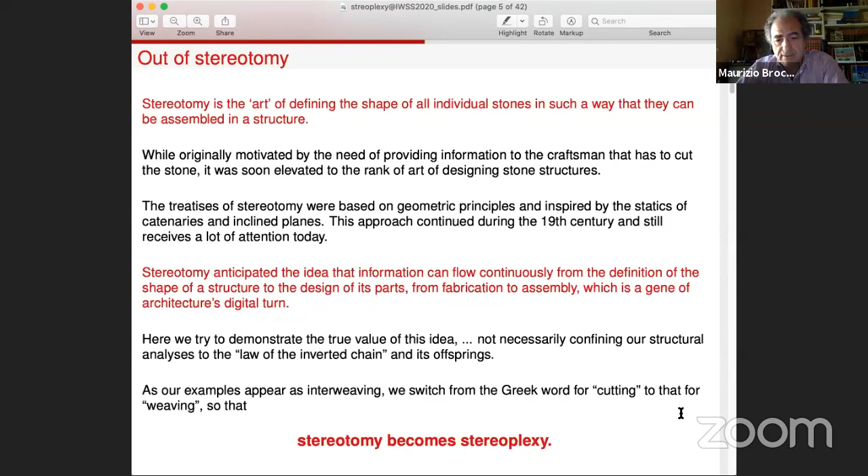This is something I would like to pass on, in a sense to go beyond this sentence. So instead of watching at the cutting issue, let us talk of the weaving issue. And so stereotomy became stereoplexy. Plexi is the Greek word for weaving. I will start with a gallery because I think it's easier for you to understand what I'm talking about.

This is a stone dome we built in Qatar, 6 meters span. It's a geodesic dome with a kind of particular assembly, I will talk about it as Abeille design of dome. So this is one example.

This is another example of interlocking domes, much smaller. Its presentation was done at the Salon du Louvre in Paris, just 1 meter span, but it's built with the same technique. This is a saddle vault, a Bohemian saddle. So to my knowledge, maybe the first and the only stone structure so far that does not have a synclastic shape, but an anticlastic shape.

And those are built with the same techniques as walls that could be transported, lifted, and that can work under wind and other loads. The multiplicity of loading that can be withstood by those structures testifies to the fact that they are not simply inverted catenary systems.

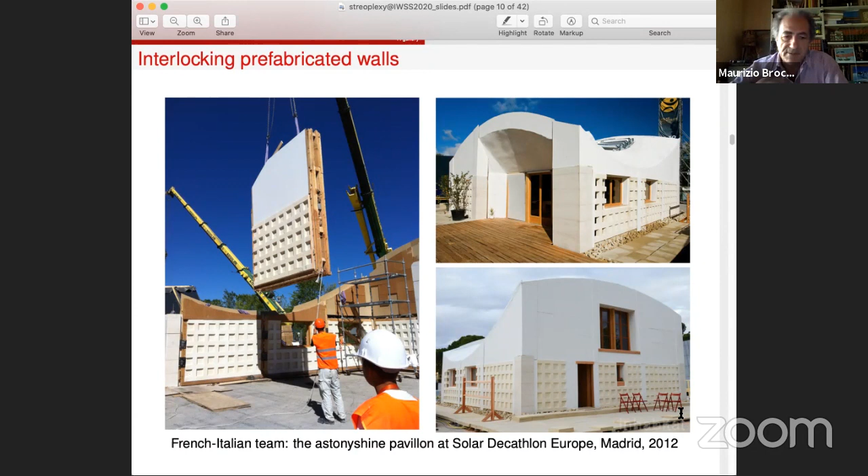Here is again an interlocked wall, this time made with cubes. It's a very old known assembly of cubes that can be found in treatises of the 17th century, but it has been recently studied extensively for the high resiliency the system can have under impact, especially.

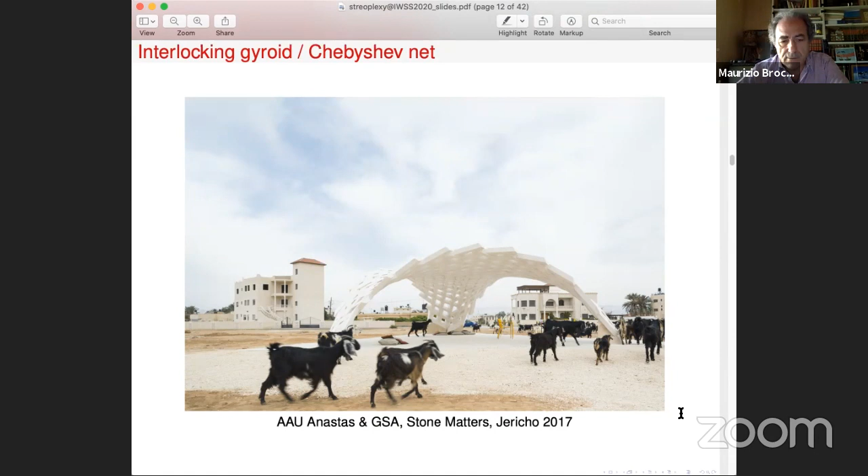And now another dome. This time it is a gyroid shape, and the interlocking is made by following a Chebyshev net on the wall, on the dome. This is a 9 meter span, built in Jericho in Palestine. Here are some details, and this is from below.

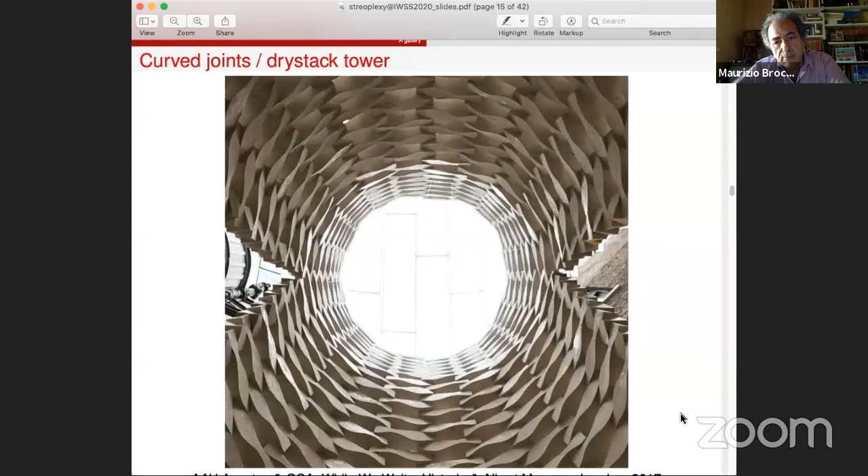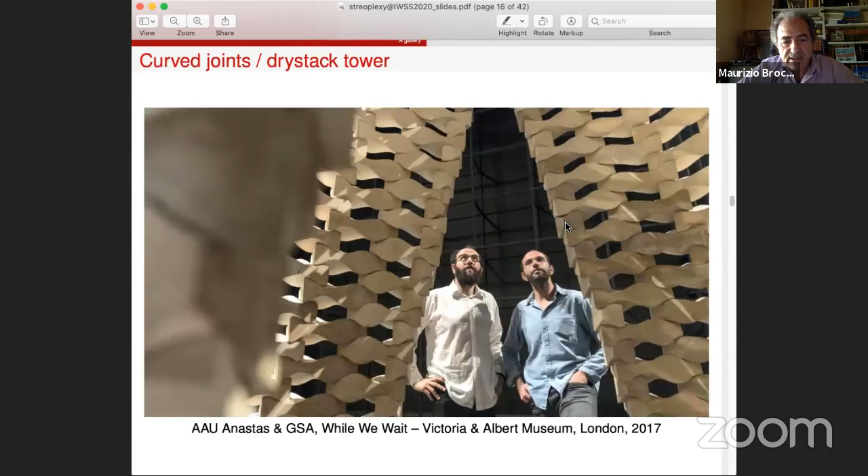This is experience on curved joints. This is the dry stack tower that was built in the Victoria and Albert Museum in London, then rebuilt in an exposition in Dubai, and in the end is today in the Cremisan Valley between Jerusalem and Bethlehem. Very famous at the time of this exposition because of the Friday prayers that were made there. Those are the two architects that conceived the tower, Yosef and Elias Anastas, in the Victoria and Albert Museum.

Some more and different work on stone. This is a sawtooth beam where a single bar makes the system work as a beam. You can see that the end has no thrust. The bar is not a simple tie, but is bonded to the stone, so the system works rather like a reinforced concrete beam than like an arch with the annihilated tension.

And following this path, and some experiences that we made after, this is the anti-seismic structure, a 6x6 building built in French territory in Israel, the Benedictine Abbey of Abu Ghosh. The roof is made with what is called a Abeille vault, which I will explain a little later.

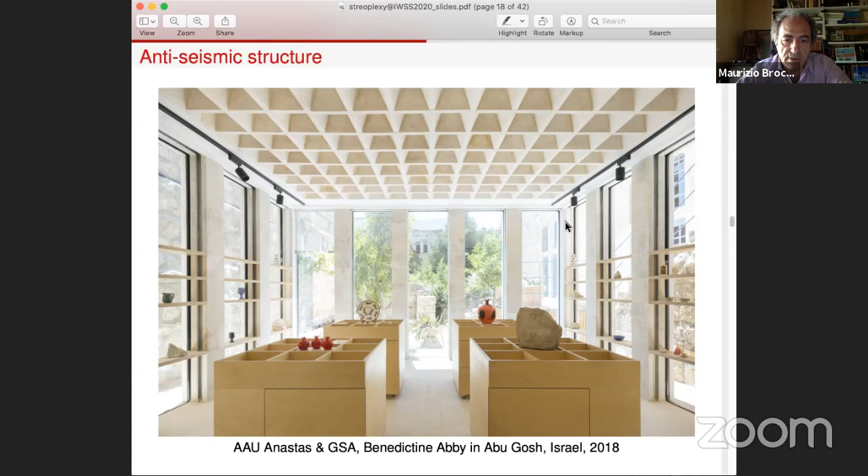It is reinforced with steel, and the columns are also only stone and steel, and the whole system is compliant to the Italian code. Notice that Palestine doesn't have its own code for seismic rules. So this is the outside of the same building.

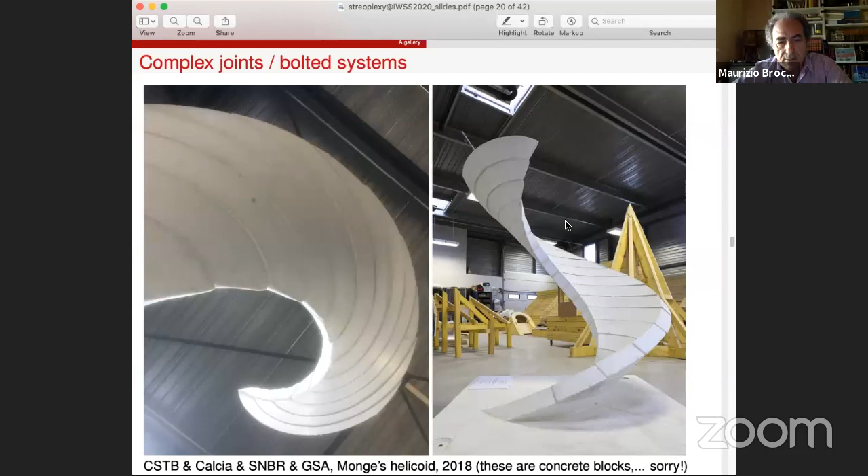And going to the working of ties or reinforcement bars into those structures, this is a Monge helicoid, so it's a ruled surface with separate blocks. Unfortunately those are not stones but concrete. This is rather a sort of an exception in my talk, but what is important here is that you have those complex joints that are linked with bars.

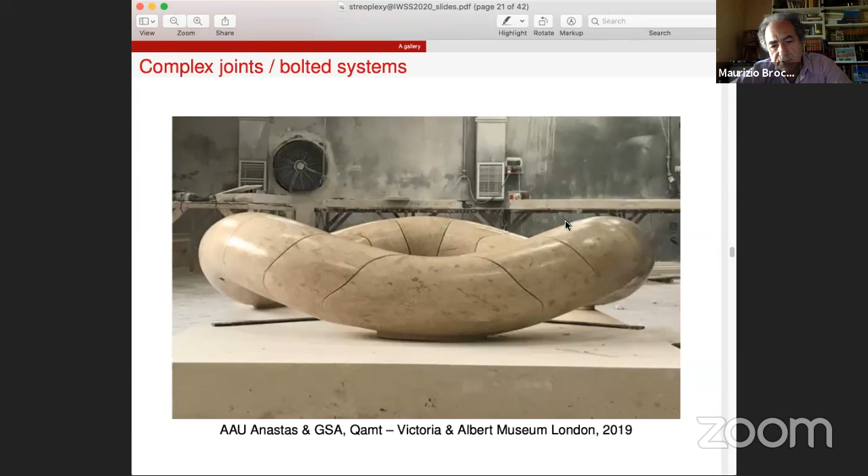And here, the last structure I want to show is a bench that was taken by the Victoria and Albert Museum as a permanent collection. And here it is, the place you find it in the museum if you go there since February 2019.

So now that I've shown some pictures, I can tell you why I think the inverted catenary system or thought is too much of a limitation for them. This is the original drawing from Frézier that shows the invention of Joseph Abeille at the end of the 17th century. You can see here this particular kind of assembly, and here are some tests. Maybe very few structures were built in the 19th century, only 2 actually in Spain with this system. Then at the beginning of the year 2000, some experiments were started in my school before I arrived.

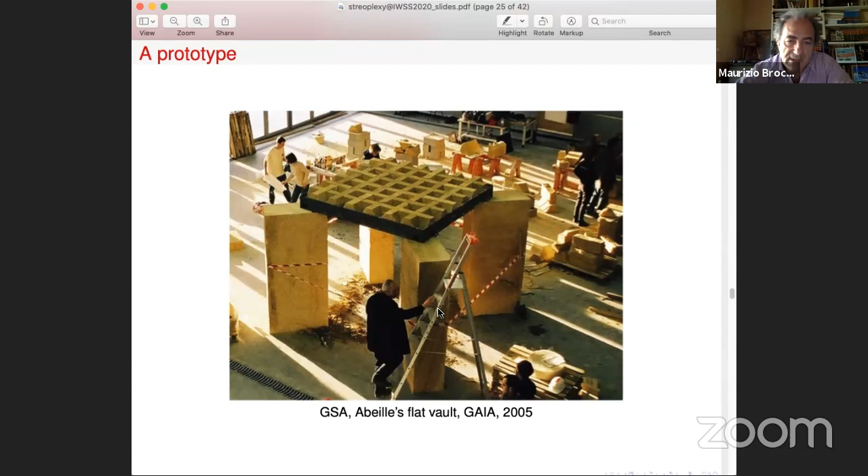And so if we do some limit analysis on those structures, you resume here what you do. You assume, of course, you know the equilibrium configuration. Stones are rigid bodies and are of infinite resistance. Joints are unilateral, and the forces transmitted through them are contained in some bounded convex domain. The load is given, and then you work on the reactions that become the parameters, so as to find a set of equilibrium forces, internal forces that withstand the external load.

And if you find one system of this kind, then you say that the vault is stable. In most cases the system is a little more complex, but in the end you get out with a kind of inverted fishnet.

And so this network of truss lines became a paradigm to understand the structure. Now I want to show what happens with usual flat vaults, so not Abeille vaults.

So this is a barrel vault, taken from Rondelet. This is a barrel vault. These are domes, and this is a cross barrel vault. In all those cases, you have these red lines that show how the loading goes to the supports. The red lines are orthogonal to the main truss, let's say.

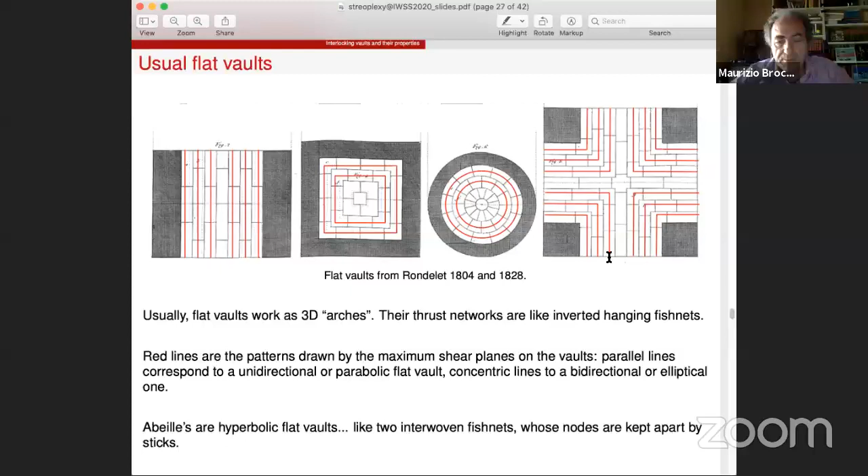So those vaults can be named after the shape of the Dupin indicatrice of their fishnet, in a sense, and they can be talked of as parabolic or elliptic. Here you have an elliptic shape or a parabolic shape that represents the inverted chain of the system. Now, if you look at Abeille vaults, this is not so.

This is the example of the fishnet or truss network for an elliptic flat vault. Something you can understand well with the truss, which is higher or lower, and you get this shape that appears. But if you do that with an Abeille vault, you cannot use a single net. You must use two nets linked with struts. So you understand that the struts, which are compressed items in the net, represent the tension in the stones.

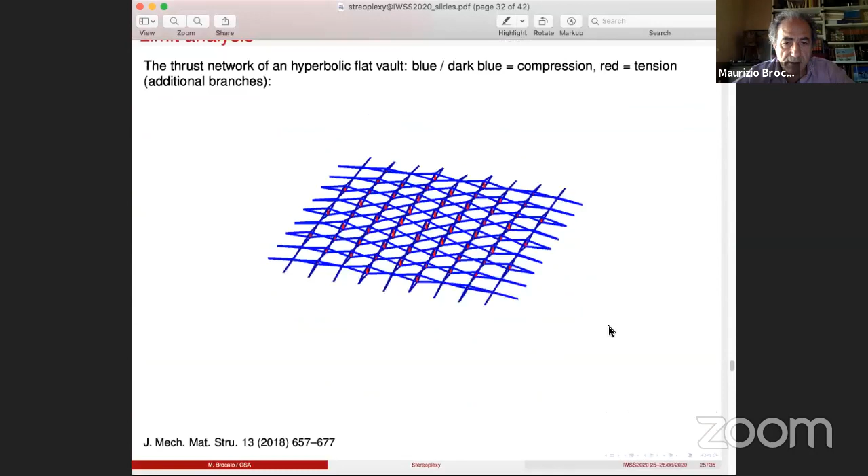And here I have some in 3D. I wanted to have an animation, but it didn't work, so I put just some images from that. You see the struts are red - this is compression in the inverted system, so it is tension in the real system. And you see the blue nets that interweave each other, representing the compression in the stones.

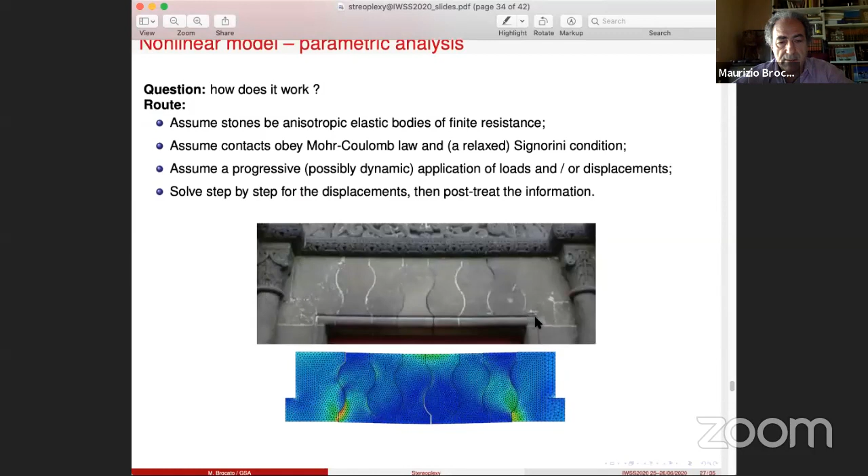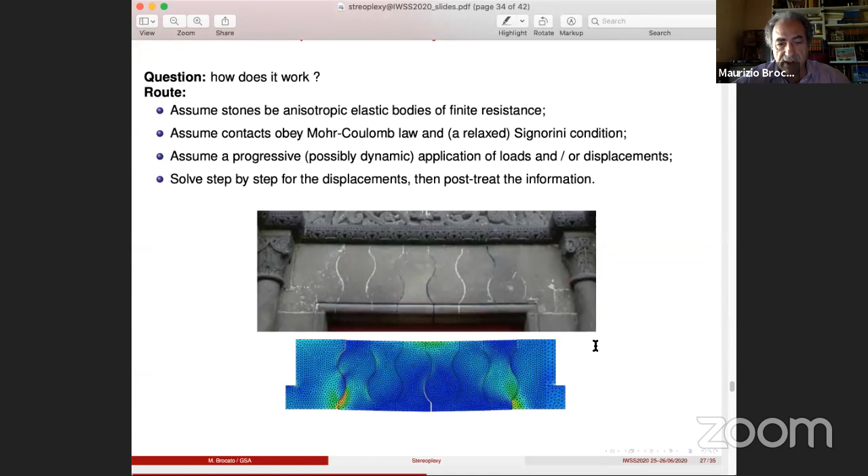Now, if we go a little further and try to understand what happens in mechanics, how it works, you can assume blocks to be anisotropic elastic bodies. You can apply a Coulomb-like law on the joints, and do a step-by-step computation, like you can see here - the simulation of a 13th century flat arch in Beauvais.

So the inverted catenary system, if it tells something, is not really connected with the real elastic energy that is present in the system.

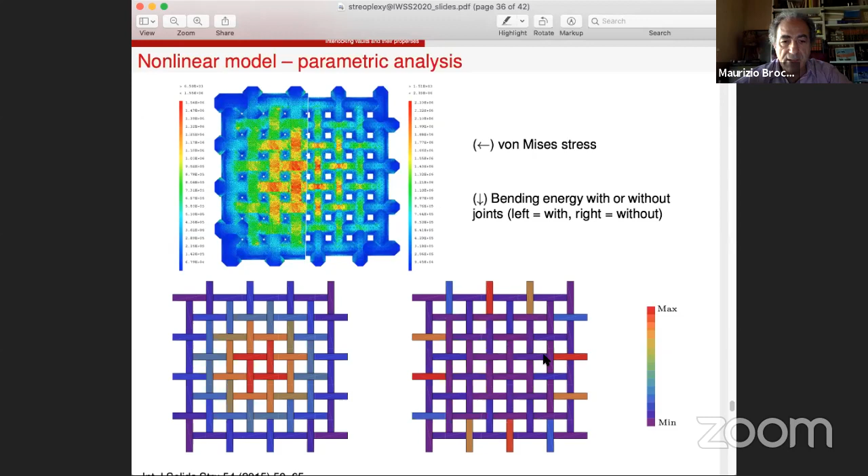This is something else you can see: if you lock all the contact on the left, and leave the contact possibly open on the right, you see how the elastic energy locates in the structure - rather in the center, in the case of a simple elastic grid without joints, or on the boundary, in the case of an elastic grid with opening joints.

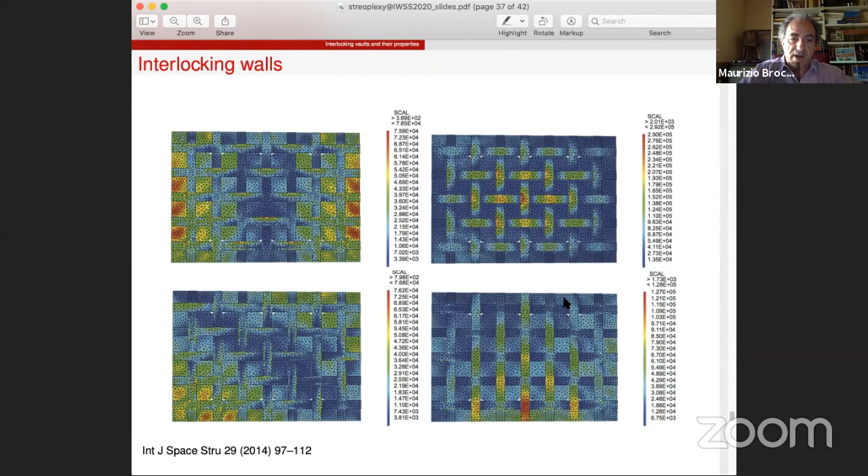And for the case of domes, I want to show another couple of pictures where you have all the joints, and you see some of them open, some remaining closed. So you understand there is actually a pattern of opening and closing joints that makes the system work. And when you look stone by stone, this shows von Mises stresses in the stone, and you can see that the stone is basically bent.

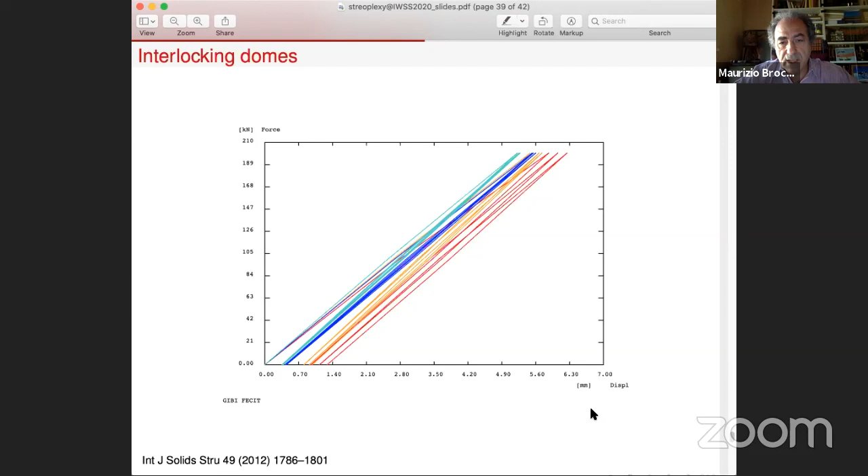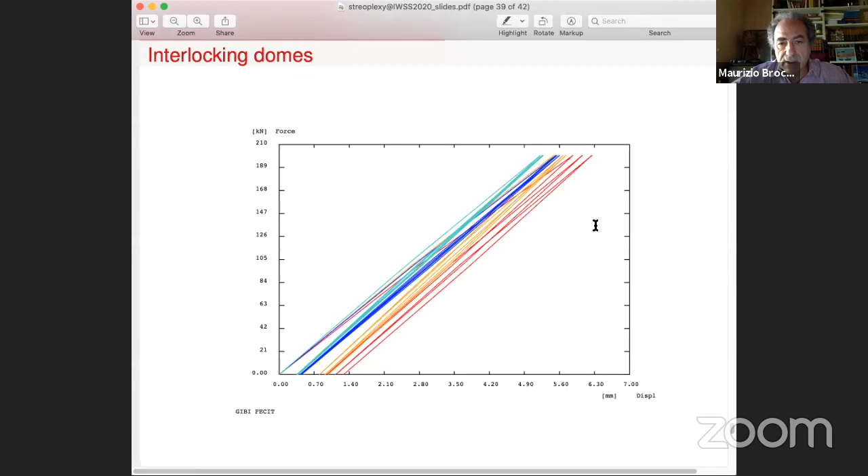This is to understand the effect of flexibility, the difference between a model with rigid blocks and one with elastic blocks. Lighter colors represent rigid blocks, darker blue colors represent flexible blocks. These are computations made with a sawtooth loading on the previously shown dome, and this is the top deflection. You can see there is a clear difference between assuming the stones are rigid versus considering them flexible.

My understanding is this is because this is a statically indeterminate system, and the way loads go to the boundary depends on the flexibility. This dependence cannot, in general, be ignored.

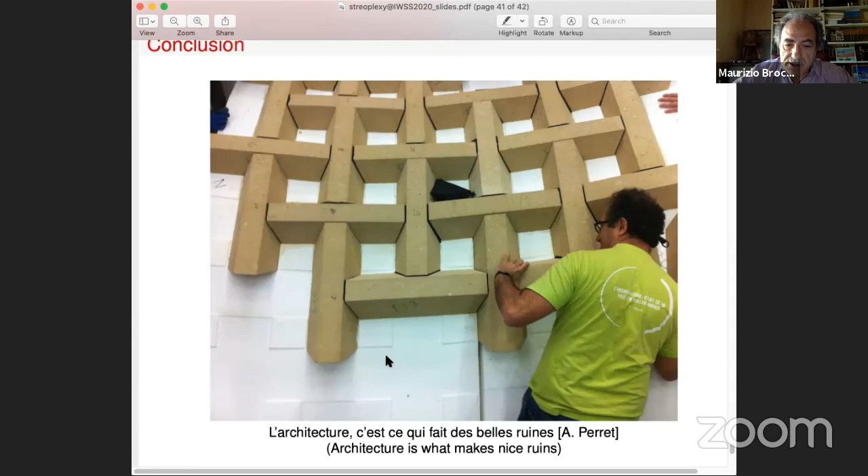So I think I've used my time, so I'll go to the conclusion, which is a simple picture and the sentence of Auguste Perret: architecture is what makes nice ruins. And those are the names of the co-authors of the work I've shown.

Thank you for your attention.

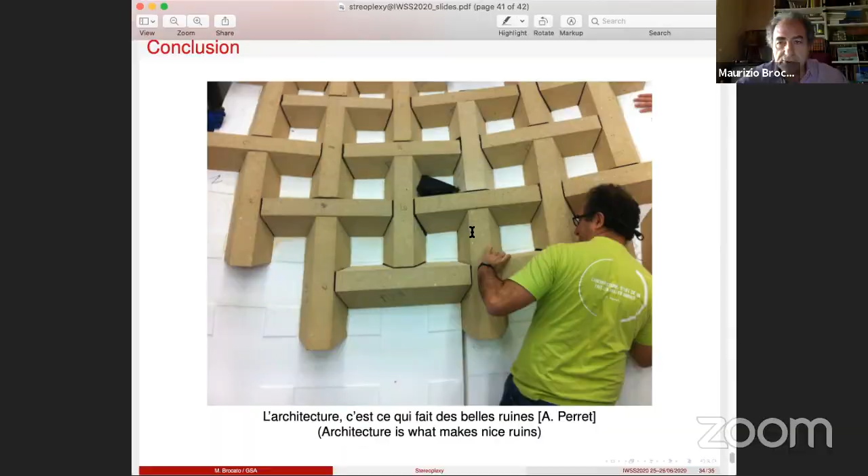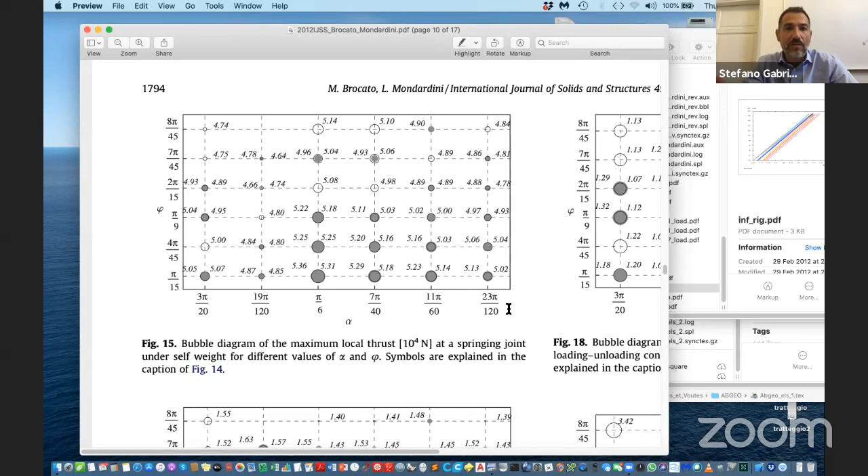I was thinking about the behavior of an arch, where the bending effect with respect to the thrust also depends on the span-to-rise ratio. Is there, in this kind of structure, a geometric ratio that regulates the effect of bending stiffness relative to axial or membrane stiffness—if you see it in light of the 2D structure—that governs the behavior of the structure, from a vault to a plate or something like this? I don't know if the question is clear.

Yes, clear. We actually did a parametric study on flat vaults to understand when they behave as a vault and when they behave as, let's say, flat vaults of the Abeille kind. This computation displays part of the answer.

You can see that whatever the parameter here—the phi parameter, again the splice angle—as you pass from one flat vault like this to one like this, there is always a dominance of bending.

To be something in between is more natural. And so you see that in the end, as soon as you authorize bending to appear through the splice angle, then it dominates.

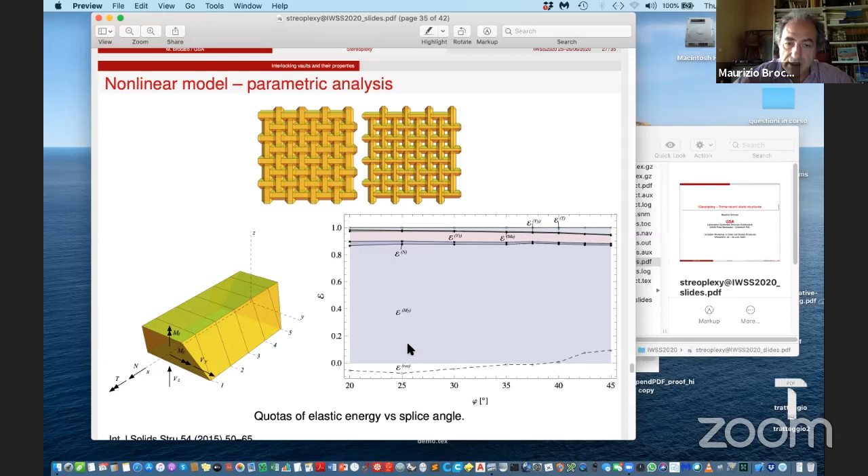Another question about geometry can be shown in this picture. This is the equivalent of the fishnet for the Abeille vault. You can see that you cannot think of a single fishnet, like in a standard parabolic elliptic flat vault. You can imagine this inverted fishnet, and it's quite intuitive today for engineers and architects to understand that it's a single net of forces.

Here you need to consider two nets, because you have faces, contact faces, that actually cross each other in direction. So the forces that are basically orthogonal to the face, or at least within a certain angle to them, go down or up depending on the direction you impose to the face, not depending on nature in a sense. You force nature to do that.

This is why I like so much this sentence from this morning: in a stone there are three things. By choosing the shape of the stone, you modify the behavior of the wall system. And so this geometric ratio is in a sense rather a local matter.

Is it here? Is there geometric... You see here the line of thrust. It's out of the vault, but the resultant is in the joint. So this is a force passing from one block to the other. It is in the joint, so this is stable. But then it is equilibrated with another force which is there, in the other joint, also stable. And the two of them have a resultant that is out of the thickness of the vault.

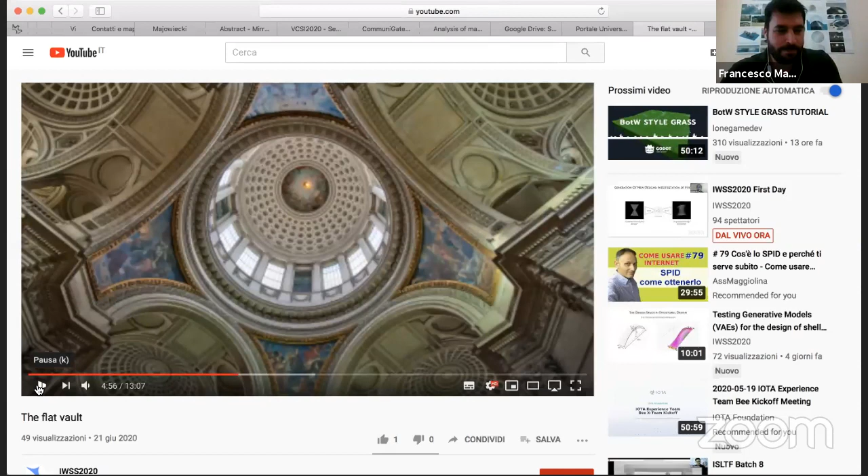Are you seeing this? Arising from the work of French architects... Yes, okay, 15th century, the audio is good. In 1739, in Paris, Amédée Frézier published the Treatise on Stereotomy. In the fourth volume, he shows some structures that he calls flat vaults, like the one we can still admire in the town council in Arles.

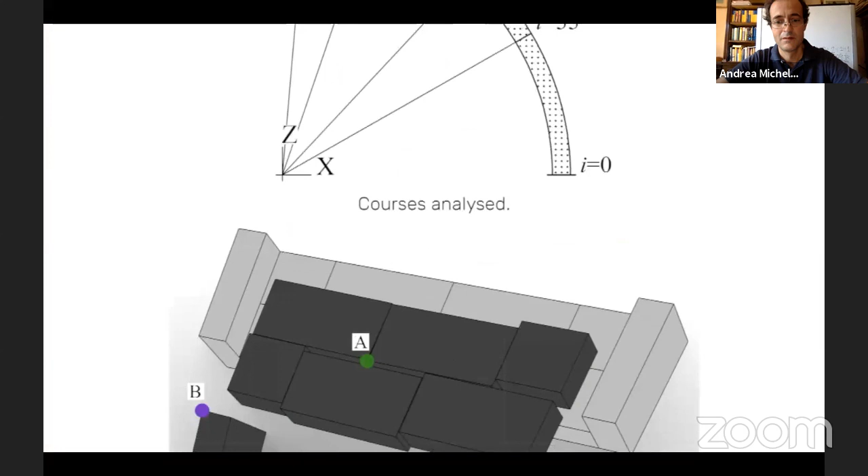Their prominent features lie in the ashlar that builds up the vault. They can be said to be self-stabilizing, and their specific shape made possible a self-balance property. Their static behavior is most similar to that of a three-dimensional flat arch, conceptually comparable to a herringbone pattern of Brunelleschi.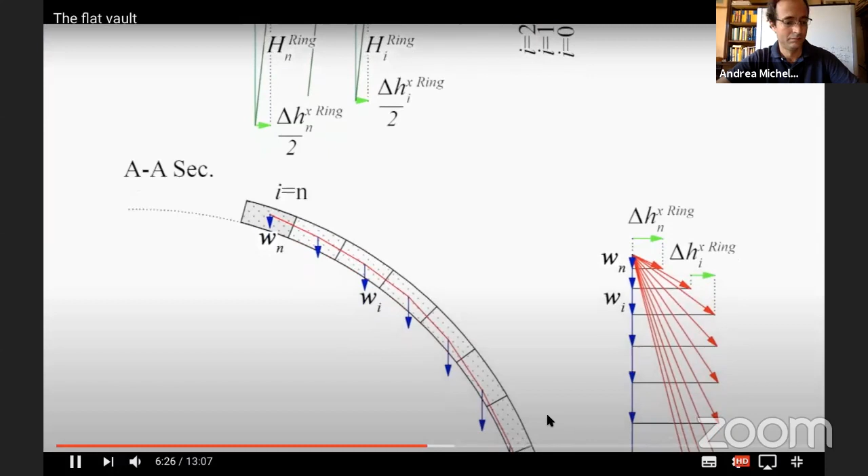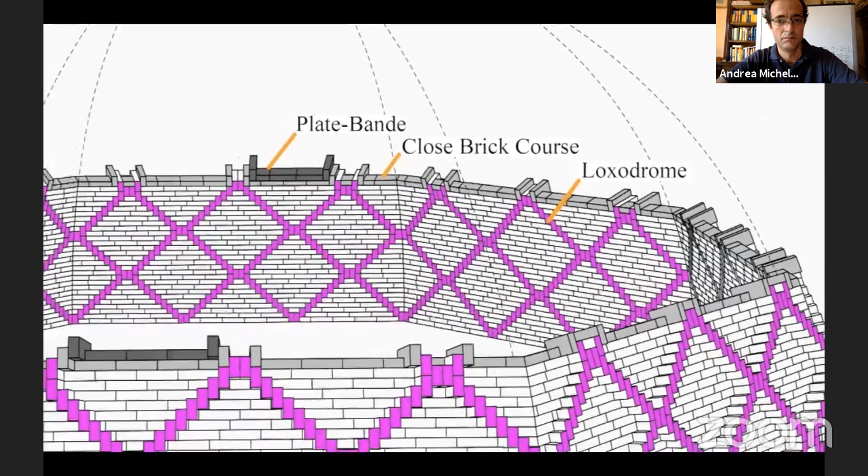Today, the theory of Jacques Heyman and Santiago Huerta's studies let us understand the requirements for balance in such kinds of structures. Their theory gives us the tools for crack kinematics and safety bounds. Geometry, shapes, and balance constraints are defined from funicular trajectories of loads and from thrust lines and surfaces.

Such flat vaults from French Baroque architecture derive from the same static principle we can find documented in the vault of Sangallo in Montefiascone and on the arches of Simon Mago and San Basilio in St. Peter's Cathedral in Vatican City.

Those vaults from the 16th century became the subjects of our research, mostly because of the lack of a plaster layer on the inner side, making the scan of every single brick possible and easier. This way, we were able to understand the constructive motivation for the position and displacement of bricks following herringbone shapes and loxodromic spirals.

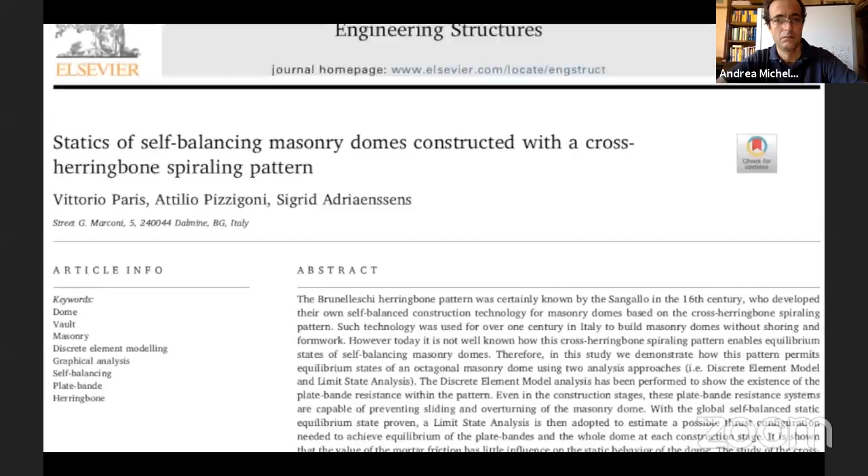It is meaningful in this respect, the paper recently published by Vittorio Paris, Sigrid Adriaenssens, and myself in the latest issue of Engineering Structures. Great attention to the topic was also paid in the doctoral thesis of Vittorio Paris, as in my previous didactical research at University of Bergamo, and the master thesis of Pezzoli, reissued in 2019.

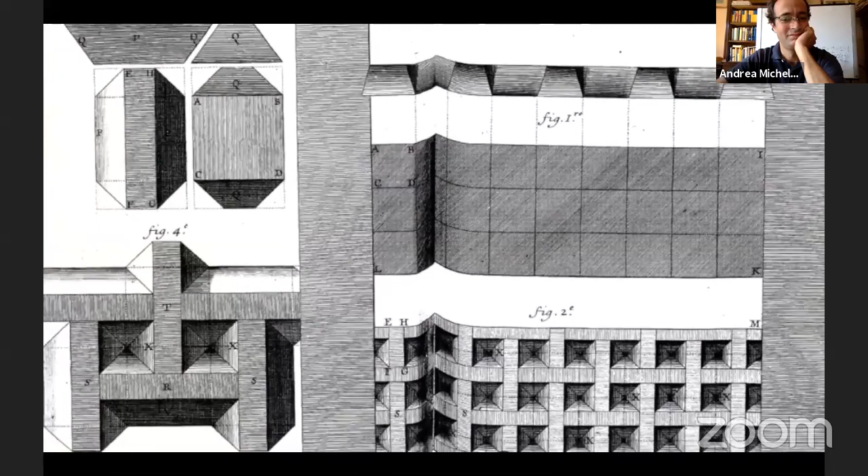After the mentioned studies on the herringbone pattern of Brunelleschi become prominent, the reference to stereotomy and its theorems developed in France in the 17th and 18th centuries.

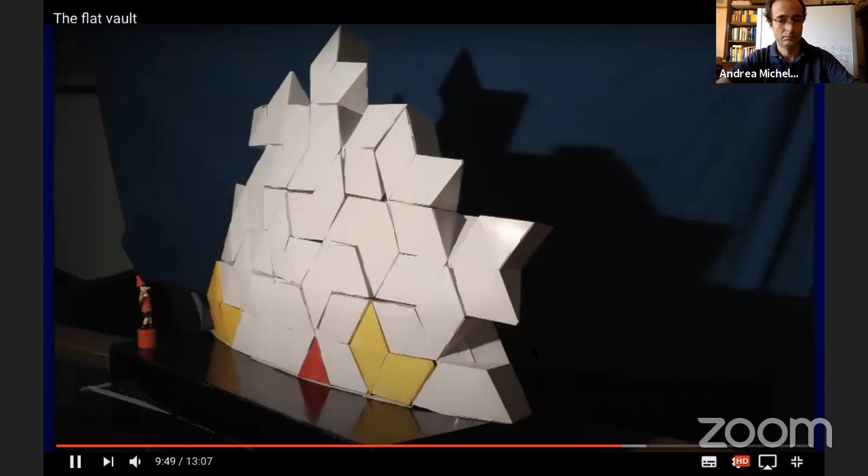On such study program, we designed and made ready the physical model of a modular ashlar. In combination with similar elements, it manifests a self-supporting behavior even during a dry displacement phase. Its employment lets us design vault surfaces with uniform, prefabricated elements showing an equilateral triangular pattern. By the modular geometry of the ashlar, by their uniformity and triangular mesh, we get an optimal discretization of constant curvature vault surfaces and more.

Thickness and shapes are bound to stress resistance of the wall structure and to the required geometry for the bounding of the thrust surface. The reciprocal structural balance of assembled bricks is attained halfway during displacement of each distinct brick, making unneeded the formwork and the temporary underpinning appliances.

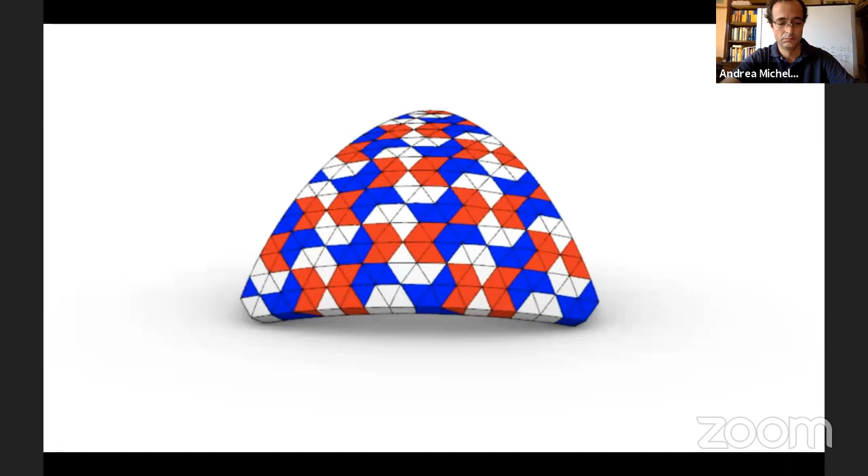This last property encourages innovative development involving mechanical arms and drones. The research starts from an ancient narrative of stones, finding their equilibrium in the wonder of reason. From Brunelleschi's dome to the mechanical arms of modern-day robotics, where technology is performative of shapes and their social use, it is in this continuity of the eternal dialectic of creative practice that our current research takes place.

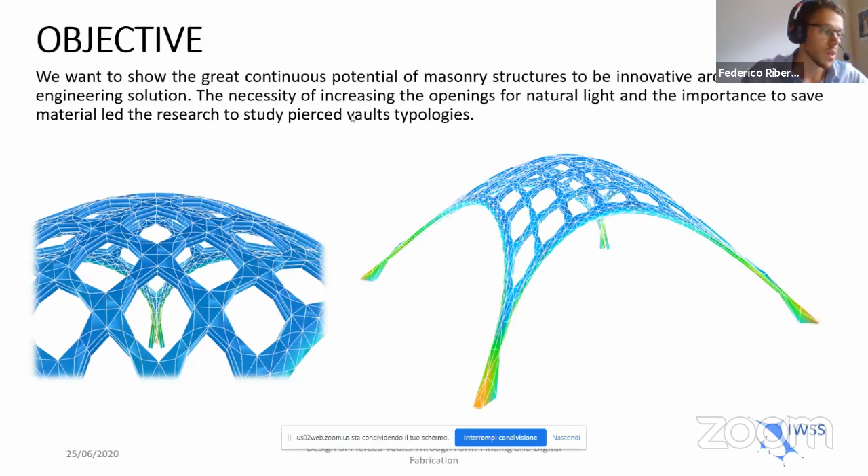The goal of increasing the openings for natural light and the importance to save material led the research to study pierced vaults typologies. We studied the form-finding process to design the geometry of pierced vaults starting from few governing parameters, such as the slenderness ratio and the holes pattern on the vault surface.

Different funicular structures have been analyzed in order to compare them and identify the best shape together with its hole pattern configuration. Different form-finding processes have been evaluated. The multi-body rope approach proposed by Amedeo Manuello and the thrust network analysis developed by Philippe Block have been applied with the support of RhinoVAULT, a free tool for Rhino.

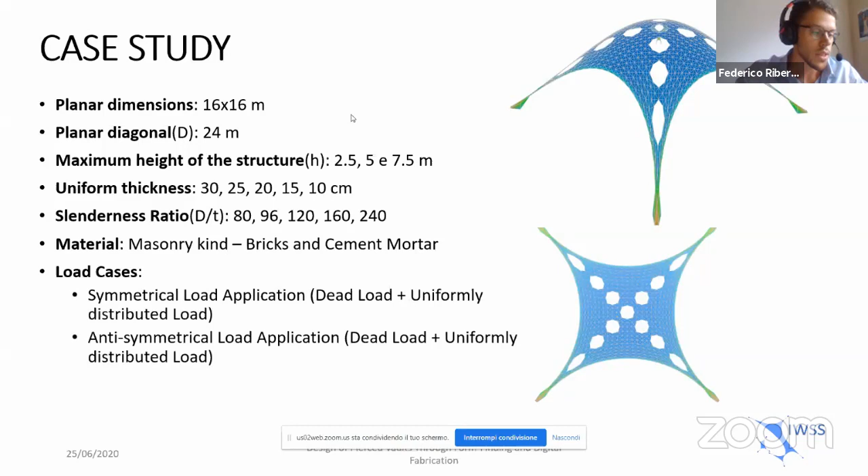The design of the structure started with a squared geometry with a side of 16 meters. Different slenderness ratios have been considered, together with different holes pattern configurations.

The TNA, starting from an initial planar hypothetical vault projection, found the equilibrium solution using static graphic principles, while the MRA based the form finding on the falling of masses connected by ropes in the time domain.

Each geometry solution has been analyzed with a FE solver, LUSAS modeler and solver. A buckling analysis has been completed to study the global stability of each structure, and the first critical load multipliers have been recorded. To evaluate all the results of the analysis, a graphic representation has been realized.

The first critical load multiplier values and the critical live load, meaning that self-weight is not included, have been represented as a function of the pierced area percentage.

It has been noticed that for each hole pattern configuration, when the hole in the center of the vault is considered, the critical load multiplier is always higher than the holes pattern configuration with lower pierced area percentage. Also, the solution is always more stable if the holes are concentrated in the central part of the vaults.

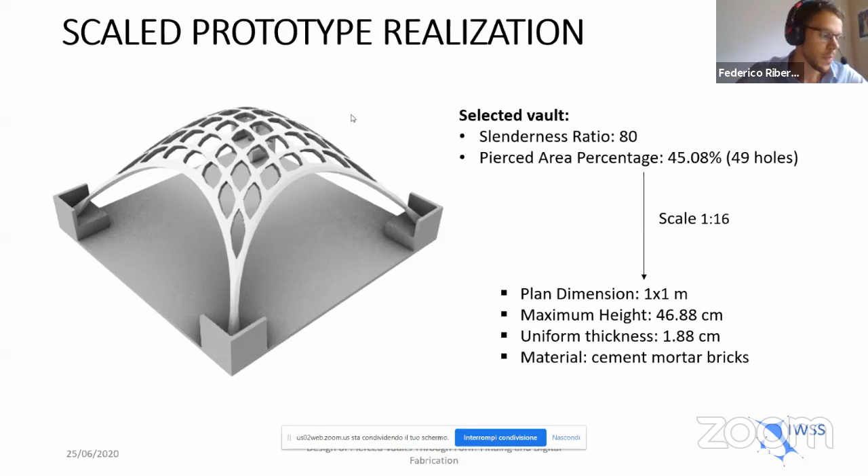To validate the results of the analysis, one of the most pierced vaults designed has been chosen to be realized as a scaled prototype. With parametrical support of Grasshopper, the continuous surface of the vault has been divided into pieces. These pieces are the basis for the design of the brick for the vault fabrication. Their three-dimensional geometry has been found with Grasshopper.

The bricks have been realized in mortar cement with a water-cement ratio of about 0.4. The formworks for each brick, which have different shapes, have been realized with 3D printing technique in PLA, a plastic material that is completely eco-friendly.

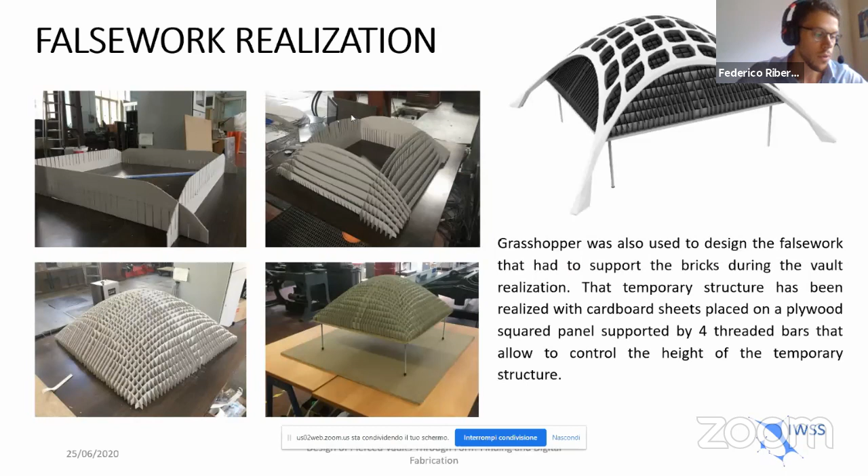Grasshopper was also used to design the falsework that had to support the bricks during the vault realization. That temporary structure has been realized with cardboard sheets placed on a plywood square panel, supported by 4 threaded bars that allow control of the height of the temporary structure. All the bricks have been placed on the upper surface of the falsework.

At the end of construction, the falsework has been removed. In this phase, the self-weight of the structure started to be carried. Image correlation has been used for monitoring under loading.

An incremental vertical load has been applied on the structure, and the deformations have been recorded. The DIC provided qualitative information on the structural behavior, and the deformations observed during the FE analysis were recognized to be in good agreement with the DIC displacement and strain measurements.

So the DIC analysis can be used to extract measured parameters to recognize in advance the collapse condition of this kind of structure. Thanks for the attention.

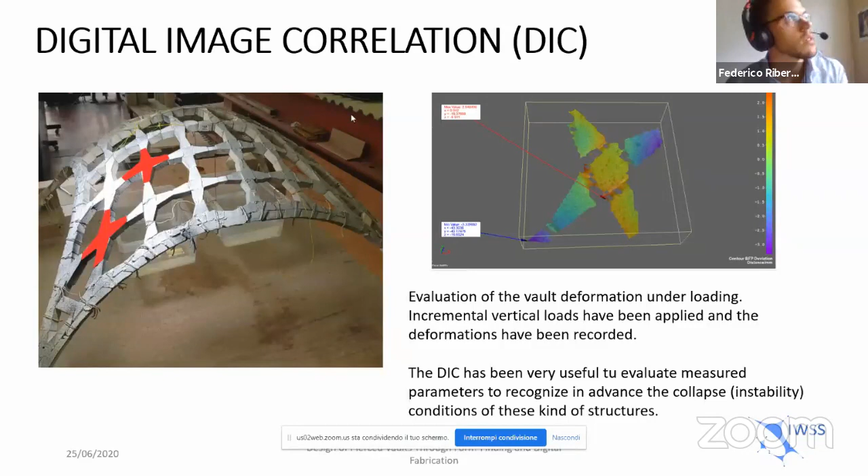Thank you, Federico. We have time for just one very quick question. So did you perform some loading test on this structure? I've seen in the preview material that you did it, but I didn't understand if it is loaded just vertically or also asymmetrically, maybe.

Yeah, in the FE analysis, we did both symmetrical and anti-symmetrical analysis to check the safety of the structures. It has been designed also only for vertical loads, and the geometry of each structure we analyzed is designed for vertical loads. One of our future steps is to introduce horizontal loads such as seismic loads or wind load, because we want to understand the behavior of this structure if loaded with horizontal loads. So it's a future step of our study.

Okay, thank you very much.

Thanks. So the next presentation is entitled Analysis of Masonry Vaults through Simplified Micromodels by Alforno and co-workers. And I invite Alforno to present. Yes, I'm here. Okay, can you see my screen? Yes. Okay, so in my presentation, I will talk about masonry vaults and the analysis with simplified micromodels.

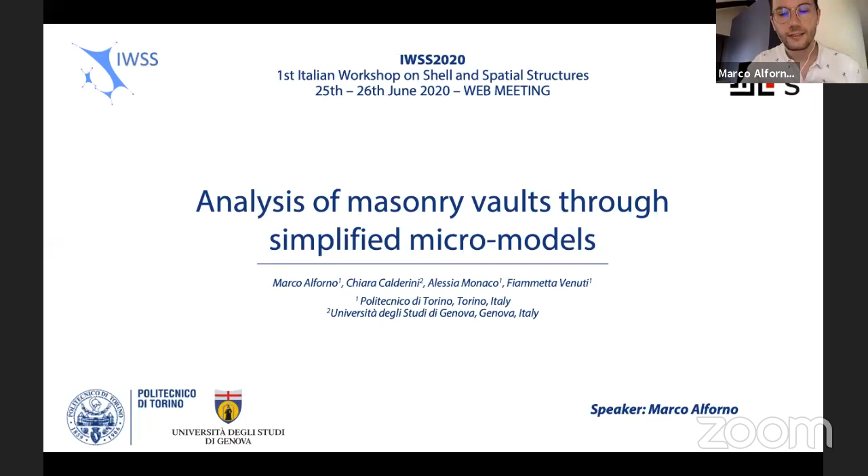Masonry vaults represent one of the most widespread structural elements in historic constructions. They can be built with different shapes and forms, but also with different construction techniques and different brick patterns. Great attention to bricklaying and the creation of the masonry apparatus can be found in the European technical literature, which has deeply dealt with the constructive phases of vaults.

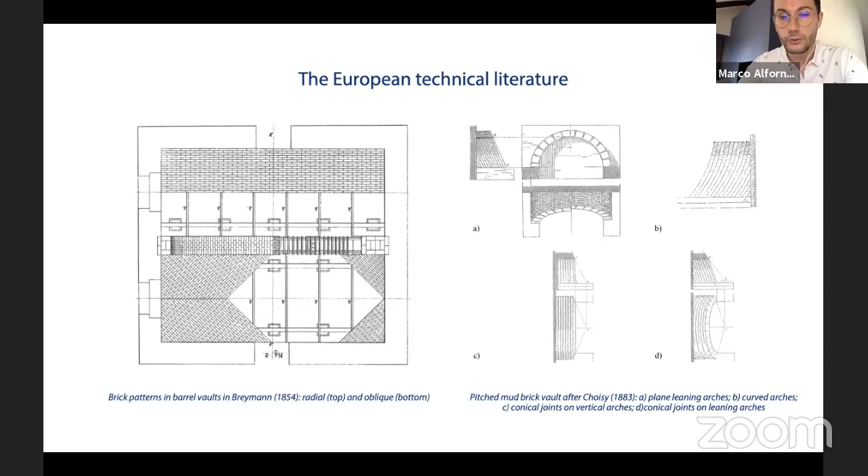This careful description of bricklaying probably highlights the desire to increase the strength of brick vaults also through the building techniques. As a matter of fact, in Europe, from Roman times to modern ones, certain building techniques meant to be used to build without formwork are possibly used instead to strengthen the crown of the vaults, perceived by builders to be a weak point due to the opening of a crack in this part.

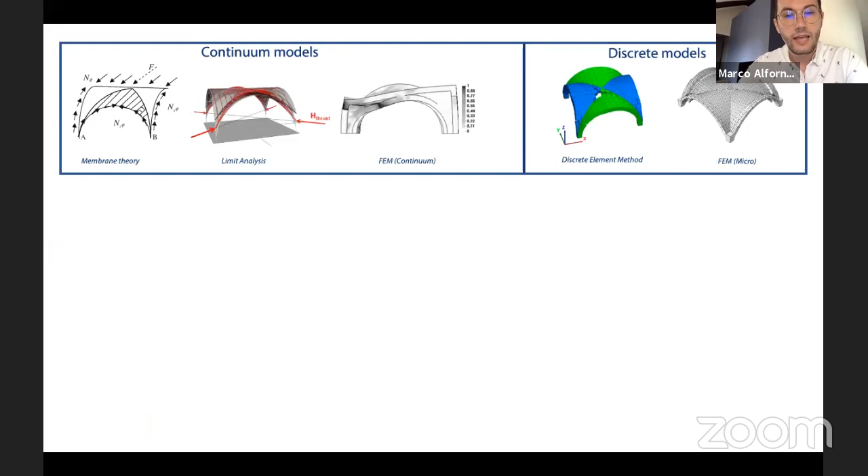So today we finally have the possibility to scientifically investigate these speculations found in the technical literature about brick pattern. To do so, discrete models are certainly more suitable than continuous ones to correctly describe the role of masonry apparatus. Among the different models, the proposed method of analysis implements a simplified micromodeling approach. The structure is schematized as a set of blocks connected by equivalent interfaces, representing the nonlinear behavior of mortar joints.

The blocks are modeled as deformable elements with linear elastic behavior. Regarding the interfaces, the normal contact in compression is assumed as almost rigid through the definition of a normal stiffness Kn, and the tangential behavior is assumed to be purely frictional.

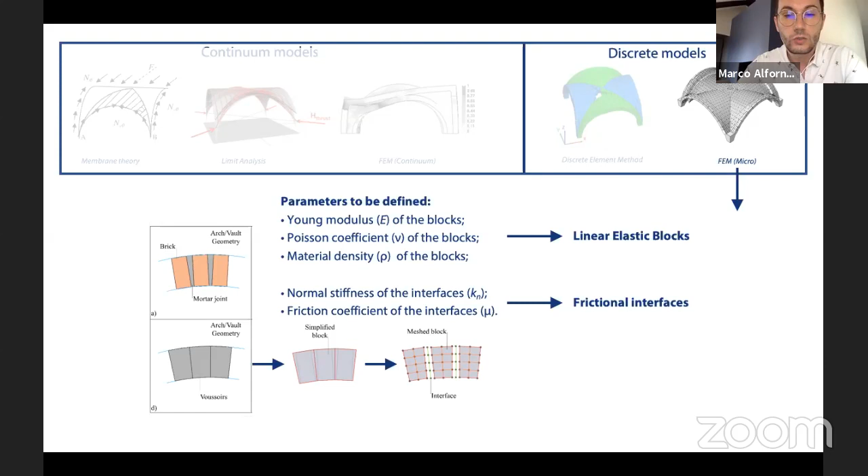The proposed approach has been validated through two experimental benchmarks, which are in-scale models of an arch and of a cross vault. Here you can see the second case study, which is a 1:5 scale model of a cross vault made of plastic blocks assembled with dry joints.

Regarding the mechanical parameters, the elastic modulus E of the masonry assemblage was obtained by compression tests. As can be seen, the corresponding load displacement curves are nonlinear, and so therefore 4 different values of E have been estimated and adopted in the analysis.

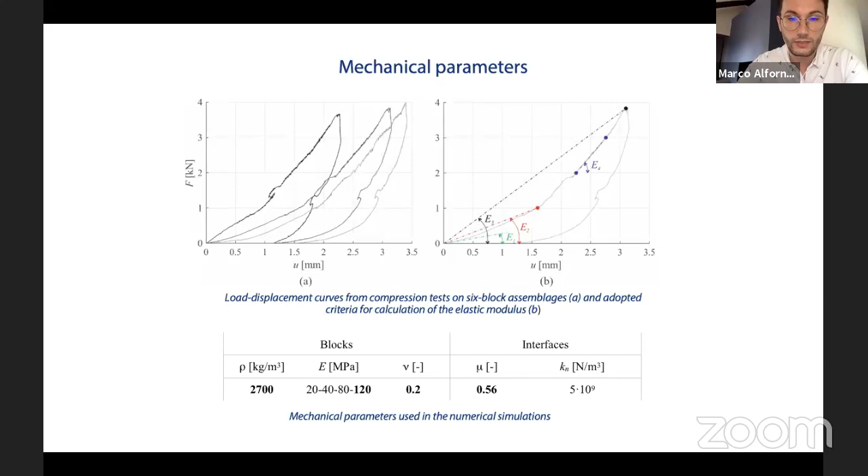Of the several experimental tests that have been performed on the scale model, 2 have been chosen to be simulated numerically: an opening test and a shear test.

Regarding the shear tests, the numerical load displacement curves are in very good agreement with the experimental ones, and also the numerical collapse shapes perfectly reproduce the observed collapse mechanism.

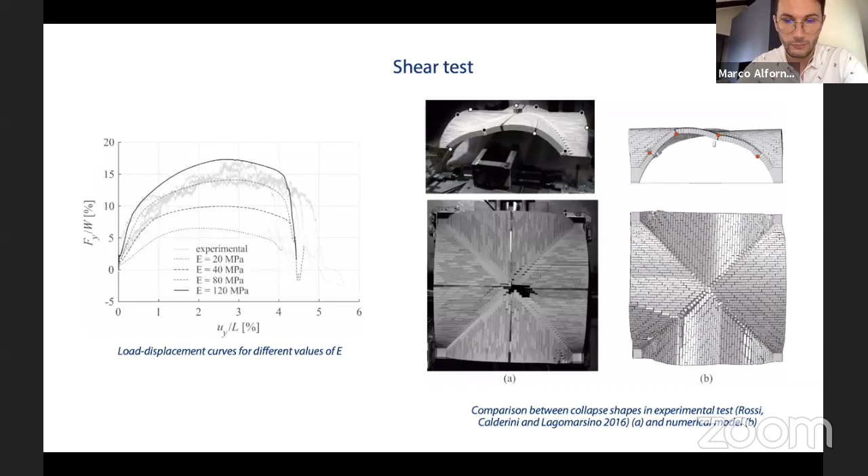So with this validated procedure, we can apply it to a full-scale brick masonry vault to investigate the effect of brick pattern on their static behavior.

The first analysis compares the vertical and pitched vaults. It can be observed that vertical bricklaying does not allow for equilibrium in cross vaults, since the courses not directly in contact with the supports slide vertically. Conversely, pitched vaults are stable under self-weight only if head walls are present, otherwise a sliding mechanism occurs.

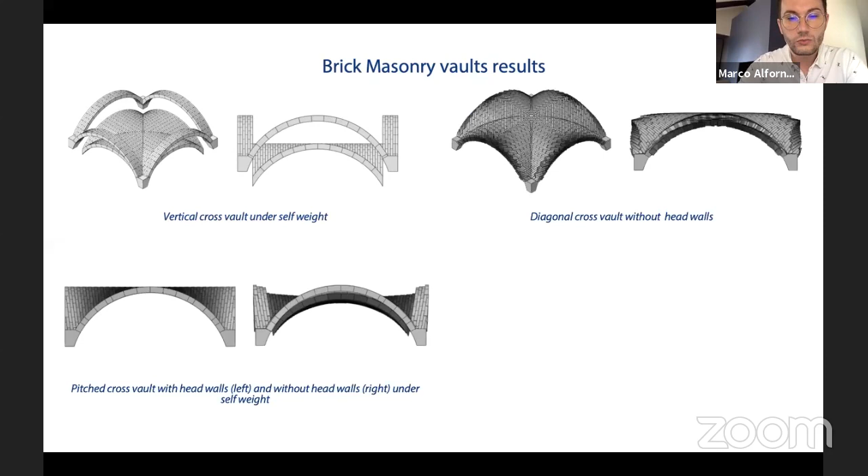A similar thing happens with the diagonal pattern. The outer part of the web edges cannot find equilibrium without the presence of confinement walls, but the rest of the structure appears to be stable. In the case of radial pattern, even though the vault is able to find equilibrium without head walls, the confinement due to the presence of walls contributes in stiffening the system, avoiding the out-of-plane deformation of the head arches.

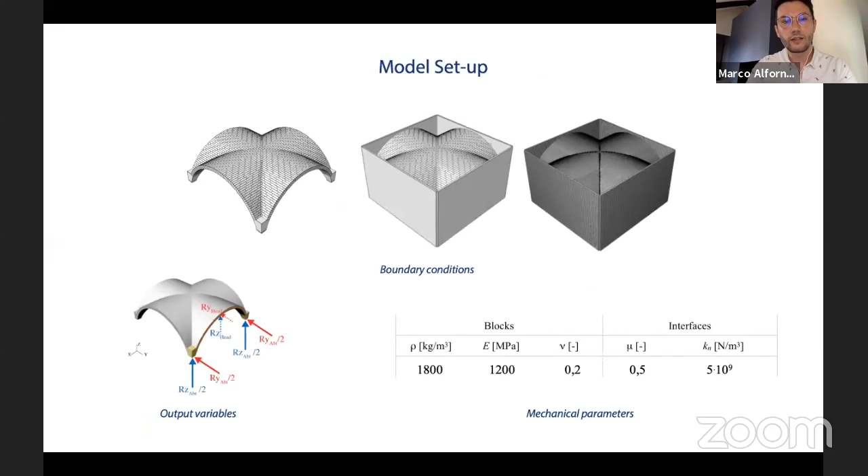The ultimate displacement changes. We did that parametric analysis because we saw that the ultimate displacement is overestimated with respect to the experimental ones. So we did that parametric analysis to see if elastic modulus does have an influence. So yes, it does.

But the overestimation of this test is probably due also to some imperfections in the experimental model that we saw during the experimental test that were not accounted for in the numerical model. Okay, thank you.

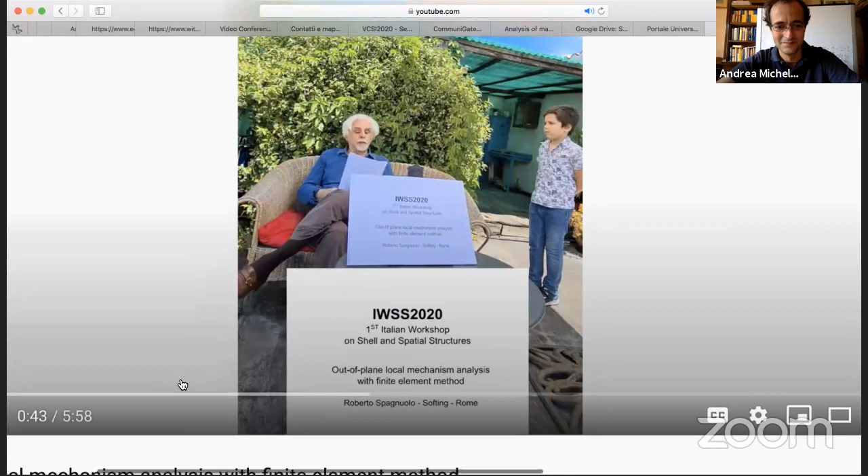Many important structures were designed and built in the past without the use of computers, but the cost and the time necessary for design were greater than nowadays.

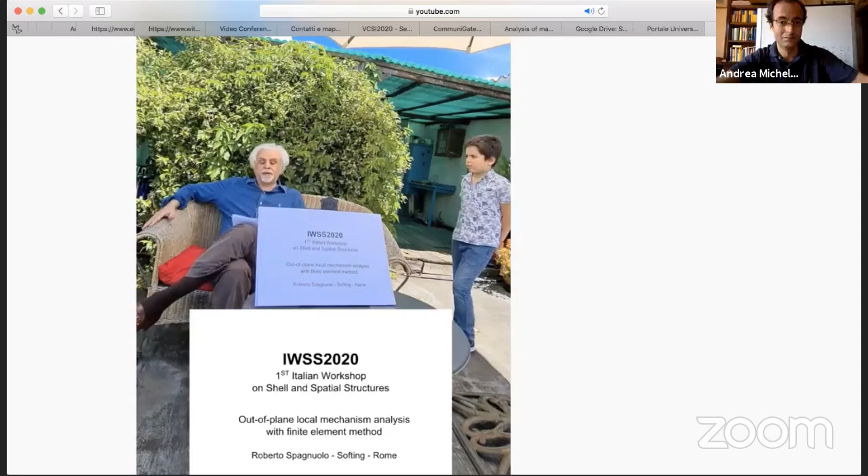I was an assistant of Sergio Musmeci, so I know the Basento Bridge history very well. The Basento Bridge was born from a genius mind, and it required a costly model.

This is the first neoprene little model that has unfortunately now been lost. And this one is the expensive model in microconcrete.

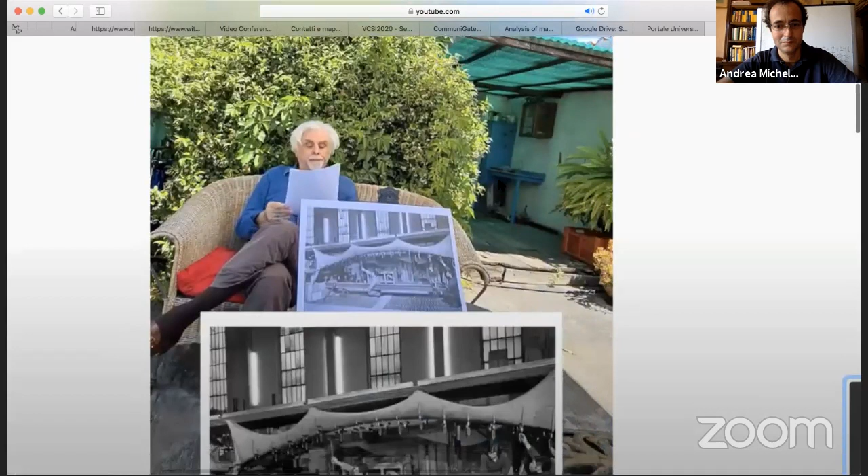The bridge was recently the subject of a recent paper where there is a contribution of mine for the FEM model. It shows the uniform stress distribution that is a prerequisite for minimum weight.

Unfortunately, nowadays there is a certain reluctance toward computational mechanics in everyday design practice. We often see collected solutions according to the method of the Roman Empire: divide et impera.

This is an example or recommendation about out-of-plane mechanism analysis. There is not a general solution. In fact, simple spreadsheets are often used for this simple algebraic model. This is an example.

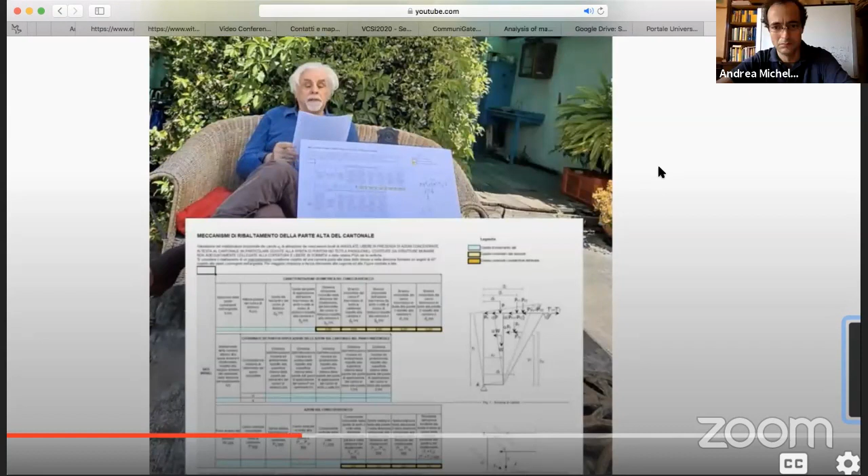In my work, I will illustrate a topic that you often encounter in everyday design of masonry: the analysis of out-of-plane mechanisms in masonry structures. This problem can be tackled with the thrust line obtained through limit analysis.

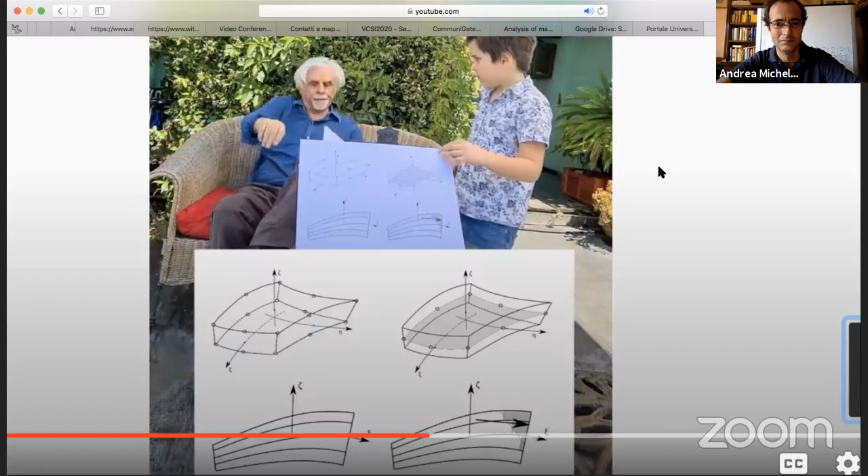In order to solve this problem, we used a layered degenerated shell element with 10 nodes, with a no-tension material and a smeared, rotating crack. To show this method, we applied it to the analysis of an arch. This shows the arch.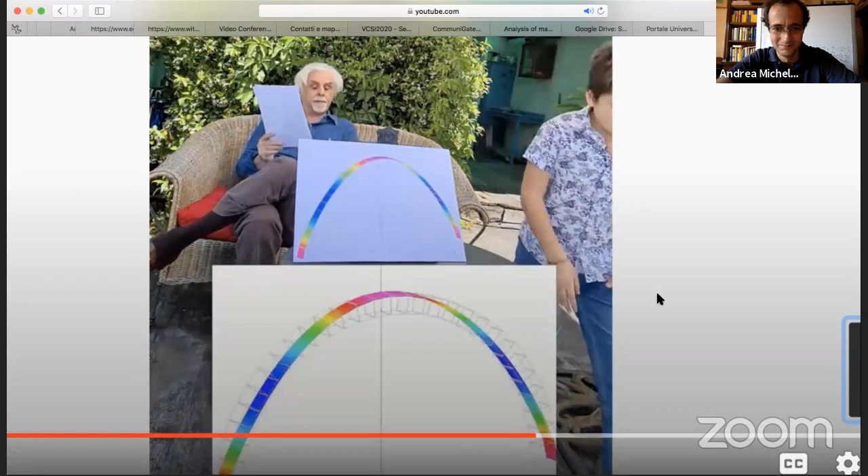No, the arch. This is the arch, this one. This is a thrust line, the arch. Now we see PowerPoint, let us see the next slide.

The eccentricity of the thrust line in color. This is through a linear analysis. In the next one, we can see the difference with the results of a nonlinear analysis with the no-tension material. The reason is clearly shown in the next image.

PowerPoint, please. And now, this is the... are you in the correct slide, PowerPoint? No.

This is the thrust line in a dome. In the dome, there is an analysis problem due to the vertical cracks. We have dragged the stiffness matrix to avoid this problem. And now, finally, the next one, please.

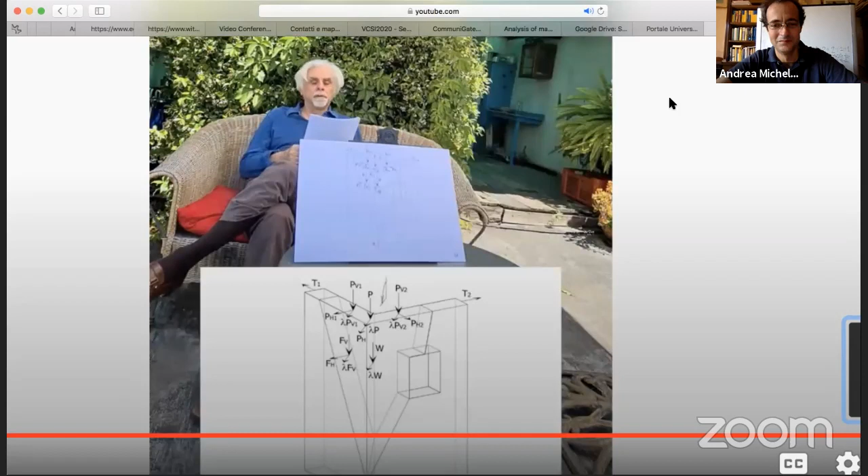And now, finally, we arrive to the masonry corner, which is the most tedious problem to solve manually. And this, I think this is the last one. No, this is also, and now, this is the computational firm solution.

It is general. The shape of part of masonry in which the thrust line is out of the surfaces, in red, is satisfactory. And the numerical results here, not shown, are also satisfactory. Thank you for your attention.

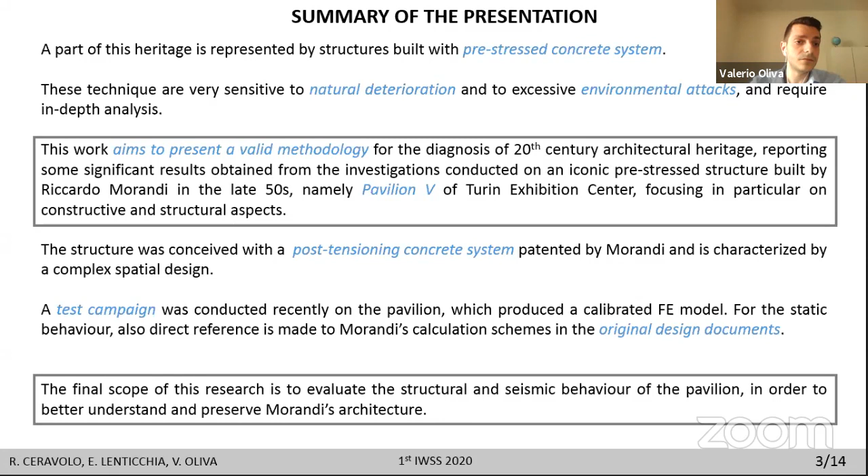Pavilion 5 was built in 1959, commissioned by Società Torino Esposizioni. The pavilion consists of a single wide space, 69 meters in width and 151 meters in length, located 8 meters below ground level.

The scheme adopted by Morandi for the pavilion is the so-called balanced beam scheme, used by the designer for the construction of some bridges in Italy.

The structural conception consists in post-tensioned beams on two inclined supports with two cantilevering side spans anchored by post-tensioning tendons at their end, exerting a balancing effect on the main span bending moment.

The cantilever provided a first reduction of bending moment in the span. In addition, the cantilever efficacy effect increased due to a vertical concentrated load at the cantilever ends.

This concentrated load, applied by the tensioning of the tendons embedded in these short strut beams, allows balancing of the maximum bending moment here in the midspan and the minimum bending moment here.

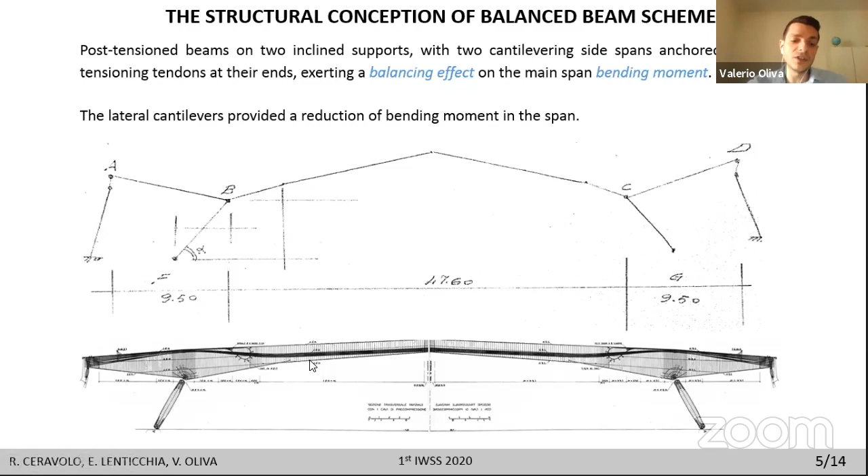These ribs are branched out to obtain a spatial structure that provides high overall rigidity and an efficient constraint to the stability of the very thin webs of the ribs.

The structure is divided into three main bodies by means of two expansion joints, which cross the roof and the external walls, and whose behavior was uncertain.

The preliminary assessments began with the creation of a 3D geometric model, which was transferred to an FE code to perform a structural assessment. A modal analysis with seismic design spectra was executed.

In the analysis, particular attention was paid to some identified critical elements. In the preliminary seismic assessment, the main uncertainties of the structure concerned the effective functioning of the joints, modeled as shell elements with a fictitious thickness.

Since it was difficult to a priori predict the contribution of the expansion joint to the structural behavior of the pavilion, as a first attempt, an elastic modulus was assigned to the joints to guarantee an overall behavior of the pavilion.

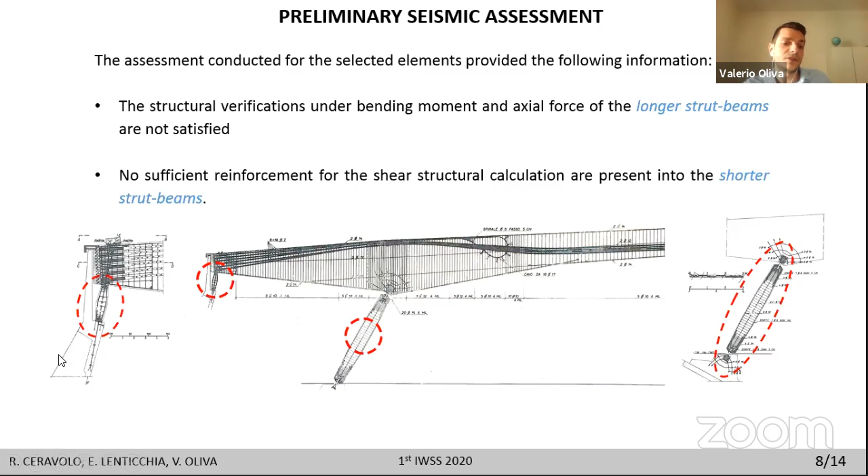An experimental campaign was conducted in 2019. Mechanical tests were executed to evaluate the compressive strength of the different elements of the structure, and the results of these tests show that the structure is made of concrete with reasonably high compressive strength.

The investigation also verified the position and the state of post-tensioning cables through scarification of some ribs.

We can see it. The latest investigations have been useful in diagnosing the important state of corrosion of cables, as well as grouting defects.

Dynamic tests were executed, moreover, to identify the modal characteristics. These tests were carried out with natural excitation, which represents a non-invasive investigation technique to avoid damaging the structure.

The acquisition system was composed of 20 monoaxial piezoelectric accelerometers positioned on different elements. Overall, 2 setups were designed.

The dynamic characteristics of the pavilion were identified, and the results of the experimental tests were then used to corroborate the initial FE model. An accurate analysis of the modal shapes confirmed the effectiveness of the 2 joints in the transverse direction.

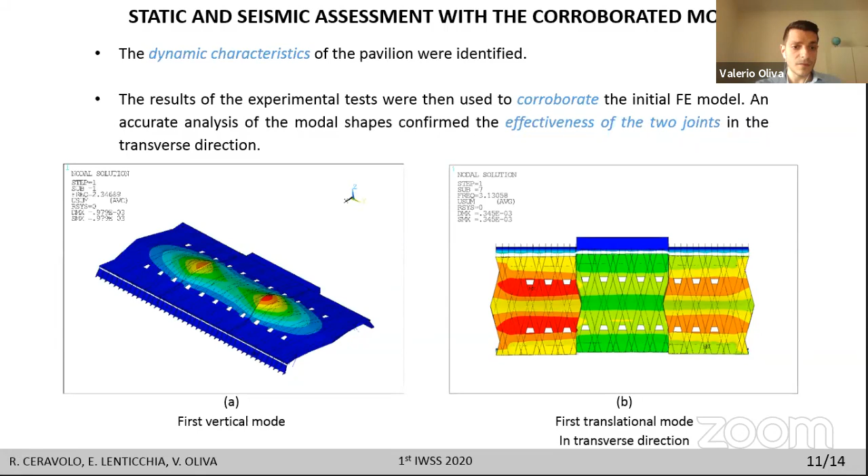The presence of effective joints in the roof constitutes an important factor of vulnerability due to the possible pounding between the three distinct bodies, as we can see here.

For what concerns the static assessment for Morandi's pavilion, the main static problem is represented by the conditions concerning the corrosion of the post-tensioning cables in the main ribs, considering the very thin thickness of the webs and the possible grouting defects, typical of the construction technologies and control systems adopted at that time.

The corrosion of steel both in the ribs and the shortest strut beams are confirmed as the main obstacle to the preservation and reuse of this type of structure.

To conclude, this contribution illustrates the important role of a multidisciplinary approach used to analyze 20th century architectural heritage for a correct diagnosis of the structural health.

In this study, the vulnerability aspects of the structure conceived by Morandi, both from the durability of the pre-stressed concrete elements and the seismic points of view, were investigated.

The post-tensioned system is known to be very sensitive to corrosion phenomena and requires in-depth assessments to appropriately read the structural conception of the building.

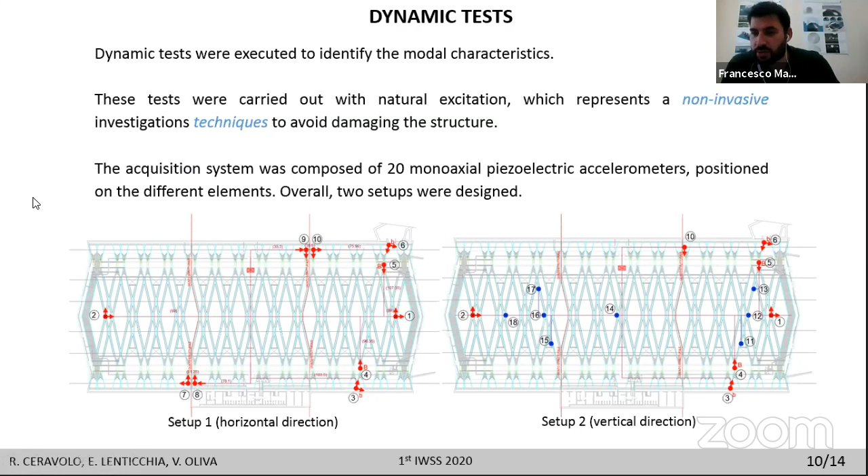Okay, thank you. And also Amedeo has a question. Amedeo, please. Yes, I know that there is not more time, but a curiosity.

Do you know which is the imminent future of this structure in terms of the plan of the city or the owner? They wanted to reuse it - in which manner?

Yes, I don't think that it can be reused in the imminent period. I think it was necessary to have some interventions to guarantee structural safety.

The second problem concerns the pre-stressing inside the shorter strut beams, because the structural conception by Morandi can reduce the bending moment in the mid-span by means of this downward force. So when these steel elements have corrosion, we have an increase of bending moment in the span. This is the static problem.

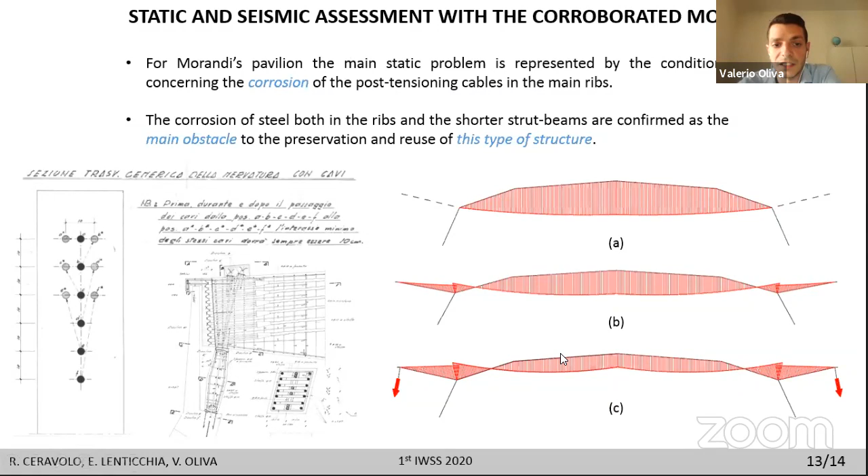For what concerns the seismic problems, we have the problem of pounding - that is another important problem. So probably in any retrofitting intervention, some shock transmitter devices are necessary.

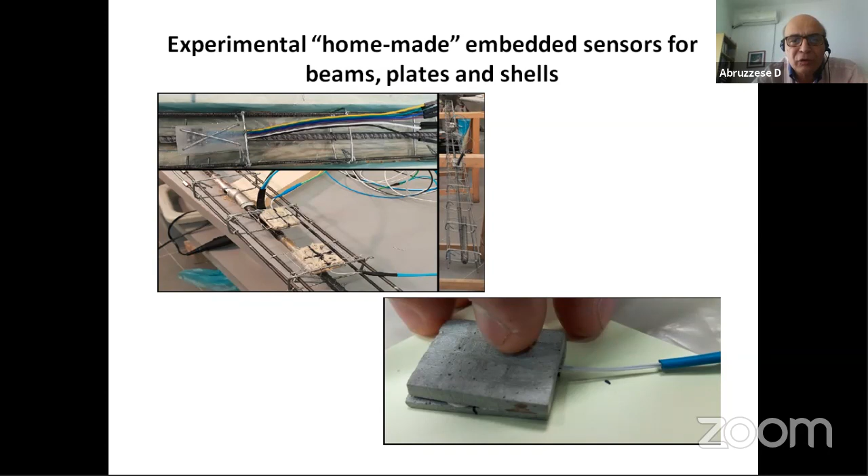The main activity we have is to prepare some devices, homemade embedded sensors, which we put in the beams or somewhere else in the shell or other kind of concrete structure, but it can also be extended to steel structure. For instance, we have here some plates.

This is the concrete plate reinforced with carbon fiber net reinforcement, and here on the other side we have also masonry, brick masonry panel. We put it to the test with some typical bending test or shear stress test, and this kind of sensor acts just as skin sensors.

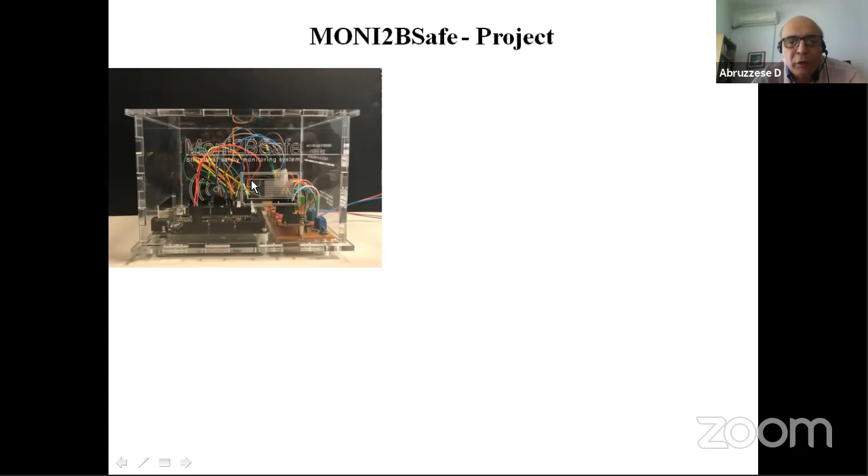All these kinds of sensors are controlled by a small Arduino-like system, like here we see a little box we prepared and tested. This is a very simple example of comparison between sensors controlled by our small box and another sensor controlled by a very expensive machine.

You can see here our small device. These devices are deformation devices, and instead of using accelerometers that give you just indirect information about the stress, we are using deformation sensors which can give direct information about the stress.

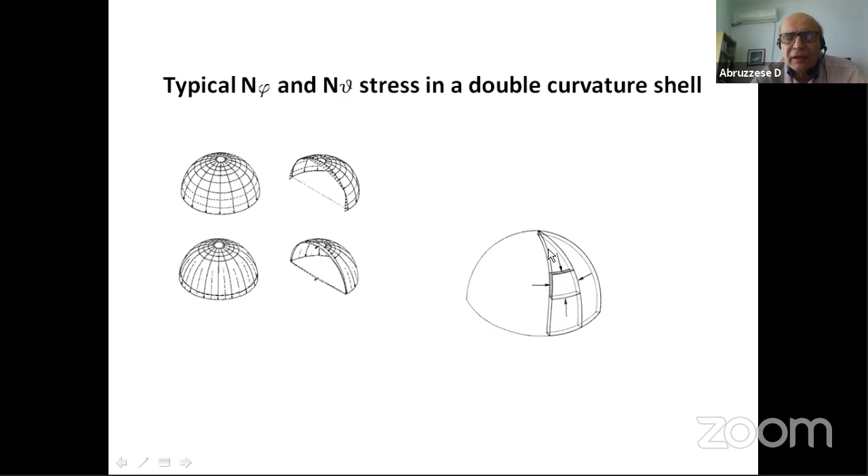So imagine, for instance, a shell with double curvature and N-phi and N-theta stress. We need some model to solve this structural problem. But if we imagine putting at one point some kind of deformation sensor like this one, we can have a sort of skin effect, meaning membrane behavior, or some other inner embedded sensors can give information about the flexural behavior.

Now there are some kinds of piezo actuators or sensors. Actuators can be controlled by electricity, but this can also be reversed. In this case, we are using the reverse way, so as sensors, and they can give you information about the deformation. We can get information about the rotation, the curvature, the variation of curvature, and this also means stress.

Just imagine some very complicated shell like this one. We are talking here about the Eero Saarinen wonderful TWA terminal in New York from 1962. You can see this is not so easy to make calculations for.

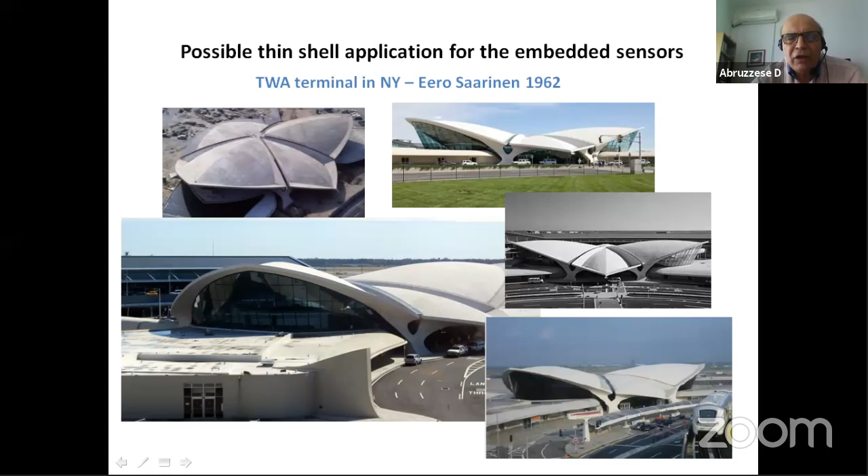We are talking about a double curvature shell, and what they are doing now is using very complicated systems like Rhino, Grasshopper, and other kinds of computer-assisted design programs, and then you can get some idea.

But you always need to check your design with some control. So our idea is that if you have a very complicated structure like this one, this is a tennis center in Hangzhou, China, with 80,000 people capacity, made by Grasshopper and other systems.

They also call it RIMO, which means Rhinoceros plus model, or some other kind of program that controls and helps you control the shape and also the structure.

You also need to make monitoring. Monitoring is very cheap, and nowadays it's very simple to organize, but we need to use it, because in that case you can have a very good control of the structure, like you have in your car.

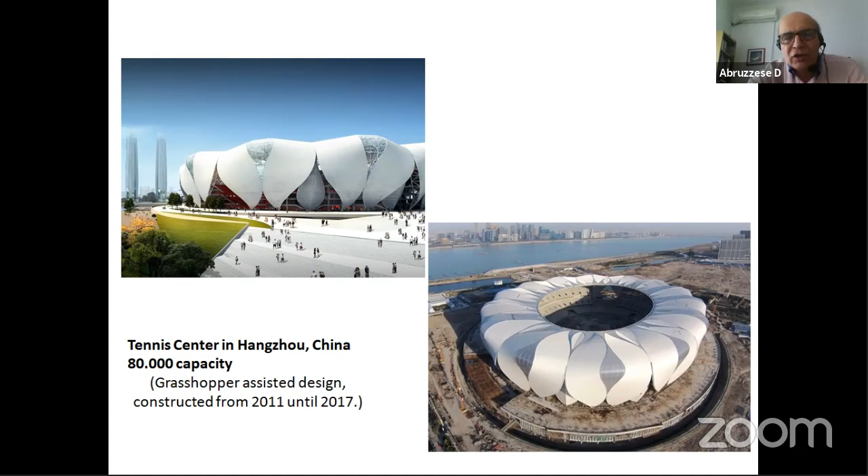In your car you can control everything, your tires, your temperature, everything. Why, as civil engineers, can't we control our pretty good and wonderful shapes made by some crazy architect? Why not? Thank you very much.

Thank you, Professor Abruzzese. I see that there is a question from Amedeo again. Where is Amedeo? Yes, I'm here. Yes, Amedeo, I see you. Ciao, Amedeo, nice to meet you. Thank you very much for the nice presentation, Professor.

I want to ask if it's possible to use also acoustic emission sensors, which are piezoelectric sensors positioned on the surface of the structure. In this case, you can also localize by triangulation the source of the signal.

Yes, look, this kind of system is being used pretty much mostly on the suspension bridge main cable, and they help you make this localization. I can never say don't use this or use that, I will use everything you can. Now it's very cheap, not very expensive.

Acoustic emission is not so efficient, in the sense that you need a very high frequency recording system to get this information. You need to always have your ear there, but you cannot do that. So it's related to the number of samples you get from your system, but in that case, it's pretty useful.